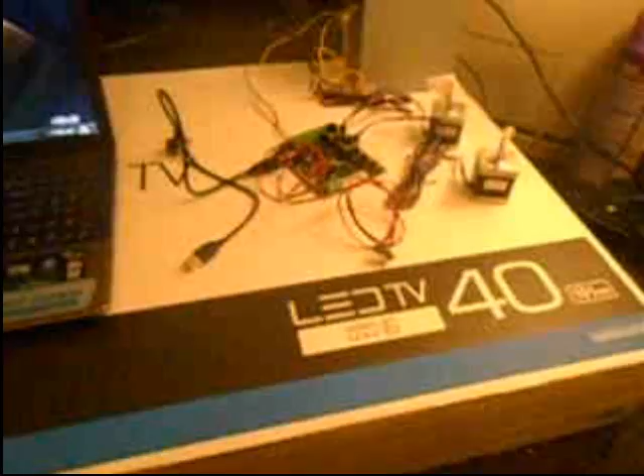Okay guys, this is the setup for my UV DLP printer, the electronics part at least. As you can see, I got a Megatronics version 3 from RepRap World and some stepper drivers.

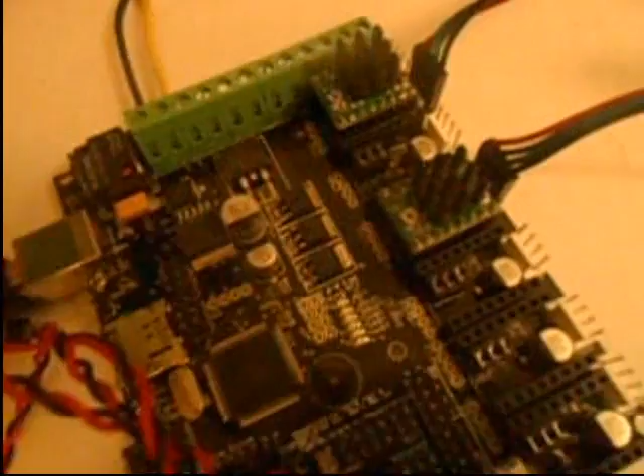We only need 2 for this setup and 2 stepper motors. These are some other stepper drivers, from Pololu. Now these particular ones won't work because they're old ones, but RepRapWorld.com assured me that all their stepper drivers work on this board, so you should have no problem. The only thing with these old drivers that do still work, that are on right now, is that they don't go on the same way.

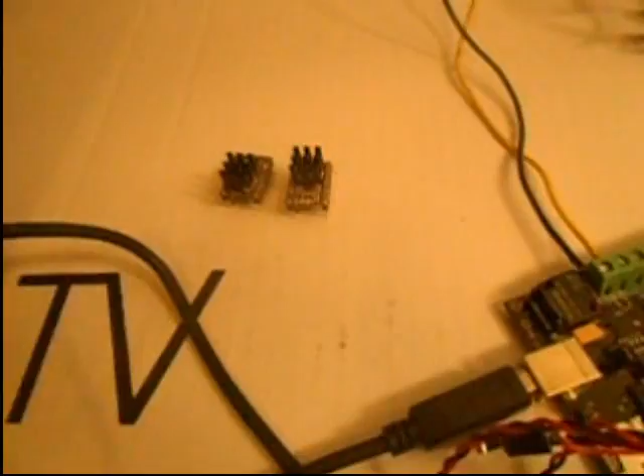So instead of that way, these go this way. Just be careful with that when you get these new stepper drivers. They are better, they can have more current go through them, and they don't get that hot either. So I'm waiting for some new ones from RepRap World. These came off my old ones, old printers I've laying around.

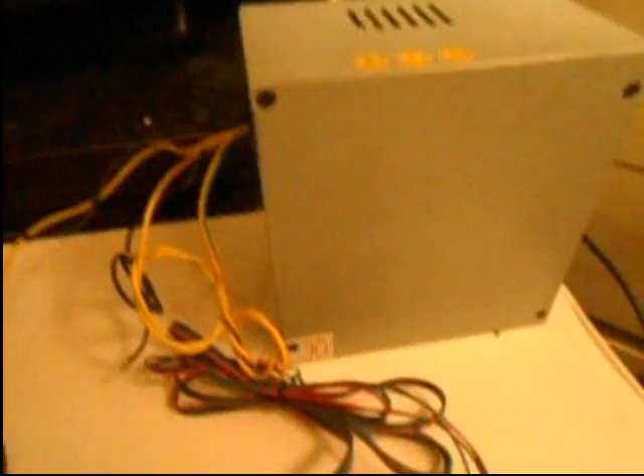So I'm showing you, this is my power supply. I tweaked the power supply so it stays on. You can YouTube that, how to do this. So I have my 12 volts going in there, and if I measure it when it's turned on, it says 12 volts on those 2 screws there. Then you know you have current going to it.

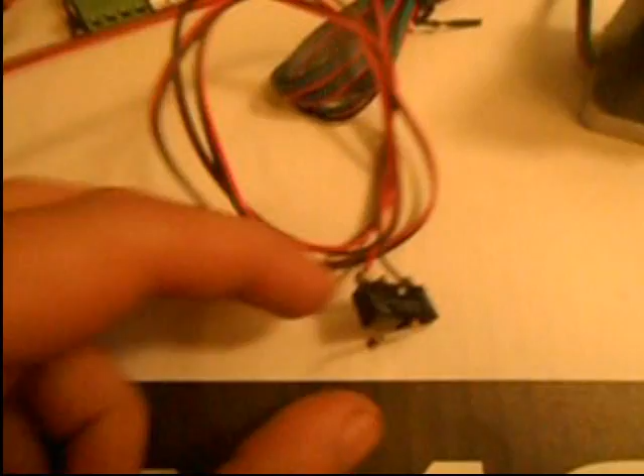So next we have a little USB cord. These are some end stops. There are 2 ways you can solder these, and I'll show you later. It doesn't matter how you solder it, because you can change it in the firmware. Right now I have it set up that I have to change it in the firmware, and I'll show you guys a little later on.

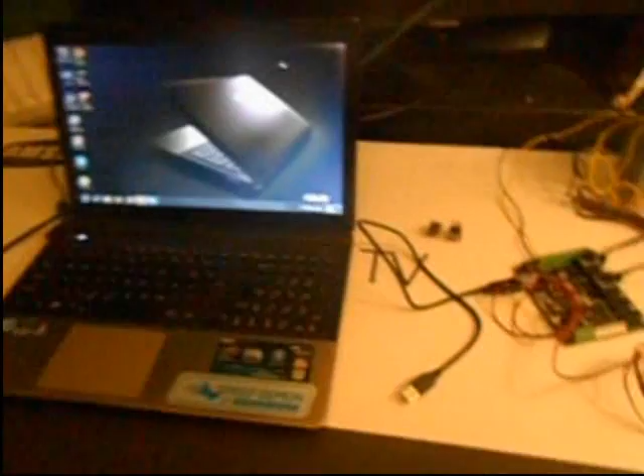We chose this board because who knows, later in the future we can add a monitor, like an LCD screen to this, and make it all standalone by itself. Right now we need the computer and we need a projector, but just for testing purposes I'm using my monitor. It's HDMI for better quality, just for testing purposes.

So here you go, this is the setup. All of this you can buy at reprapworld.com, very friendly people. And now I'm switching over to the computer. One more thing, let me just put a little close-up on the end stops.

What I have right now is the X minus. You can see it from here, the X minus and the Z minus. If you look on the side there, you'll see that there's a plus, a minus, and an S, and I'm using the S and the minus. Because if you have the plus and the minus, you short out the board. So just make sure you have that correctly, the S and the minus.

Okay, we're going to the computer now. Right now we're on the computer. I have a few things set up already, a few websites, and I'll explain a few things on the way, and in a few minutes you'll be up and running if you follow these steps correctly.

So I have some websites open: the RepRap World, the Arduino, and a website where we get a lot of information from, and you should check out this site because there's a lot of good stuff on it. But let's start with the Arduino board.

This Arduino board was a little bit easier to set up than the previous boards, because when I plug in my USB, Windows recognized it and installed the drivers automatically. Before that, we had to install the drivers manually, but now it's pretty easy.

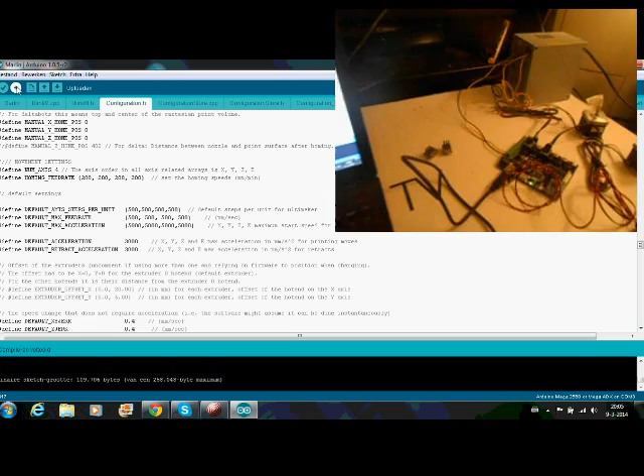So basically I'm gonna start uploading now. There we go, click. It's compiling again.

And then you'll basically see the upload on the board. Here we go. It's uploading. As you can see here, it's a pretty sizable firmware.

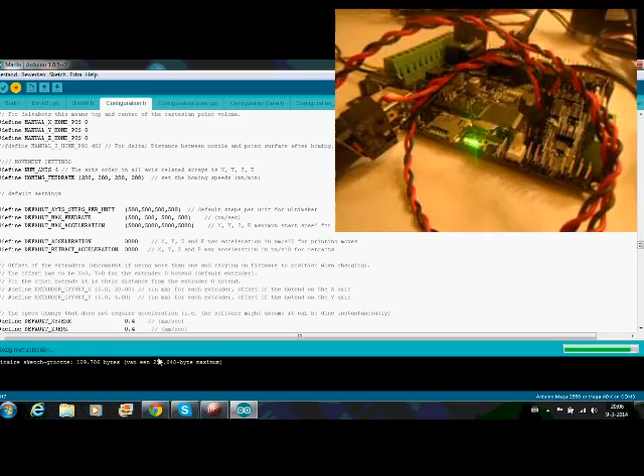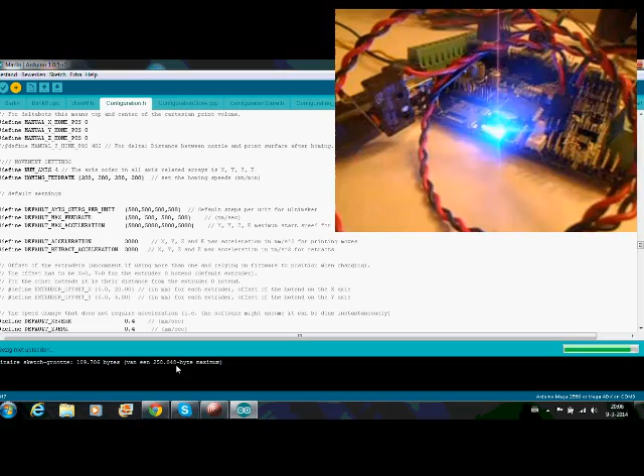But again, if we're gonna later on make LCDs and this and that, you'll need the space on the board. That's why I went for the Megatronics version 3. It's almost done. And boom, now you have your new firmware on your Megatronics version 3.

So what we do right now, we can minimize this because we're gonna later on work with this, but it's more for when you have the full printer in operation to go and tweak these things. So you can actually save it and close this. I'm gonna minimize it so I can change the settings later.

Basically I'm going to go now to this website here, build your own SLA, because I get the software that's gonna run this board from there. So I'm gonna open the software. Here we go, Creation Workshop, and this one. And we're going to download the Creation Workshop.

Goes pretty quickly, not a big program. There we go, we extract all the files on the desktop. Extract. Done already. I'm gonna minimize this again. And here we got our software. I'm gonna double click on it.

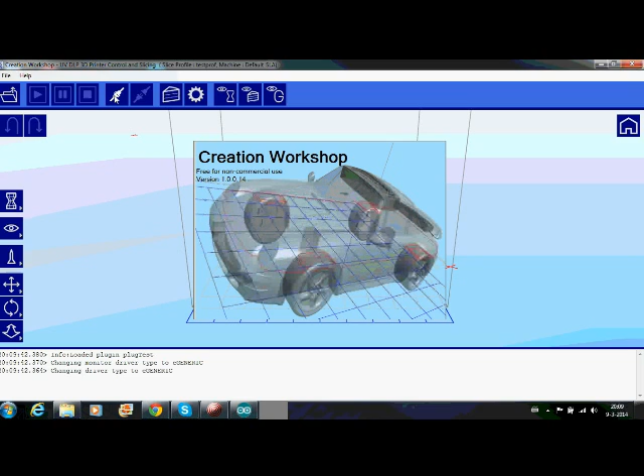Default as SLA, and then I'm gonna change this to my COM port, and my COM is 3, so that should all be good. Right now I'm gonna save this and close this. Right now if we go again here, we open this, and I connect.

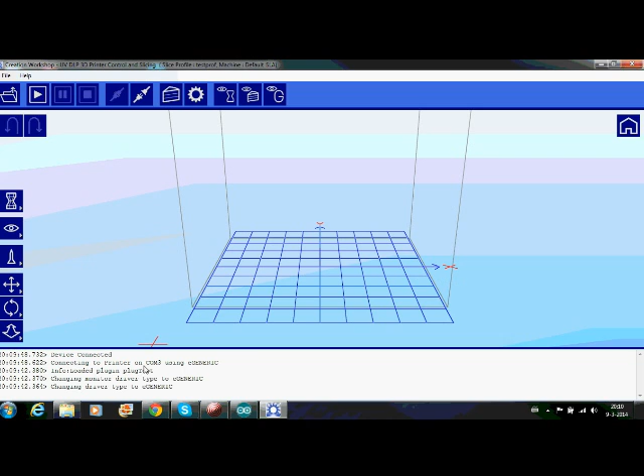Basically, there's a few other settings that I wanted to change. This is the settings button, basically configuration. Here I can see if my stepper drivers are working, but I first want to put which display I'm going to use for my display. And display 2 is my HDMI. I apply it.

Basically, if I connect again, my HDMI TV is now turned black instead of the window I have right now. Okay, so we are connected. This 3000 millimeters per minute is a bit too fast for me. I'm just going to change it to 100. And now I'm going to test the motors.

So I'm going to try to incorporate it with the video I'm making now. So I'm pressing the X 10 millimeters. It just needs to reset. There we go. Pressing the Z 10 millimeters up.

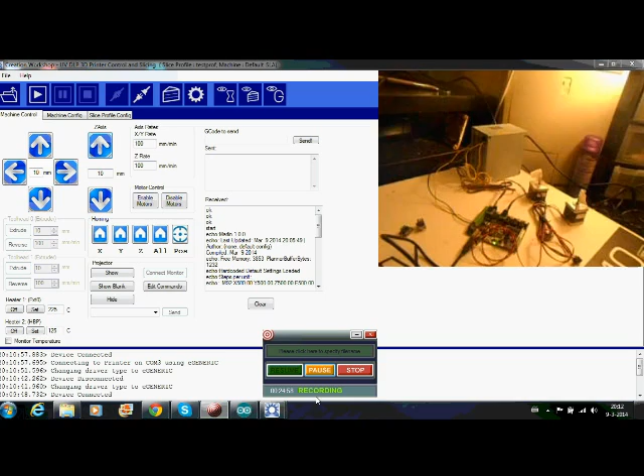Okay, I had a little issue, but I just forgot that I need to turn on my power supply. Whoop, I thought there was something wrong. Now the power supply is on. I'm gonna press that up again. Can you see?

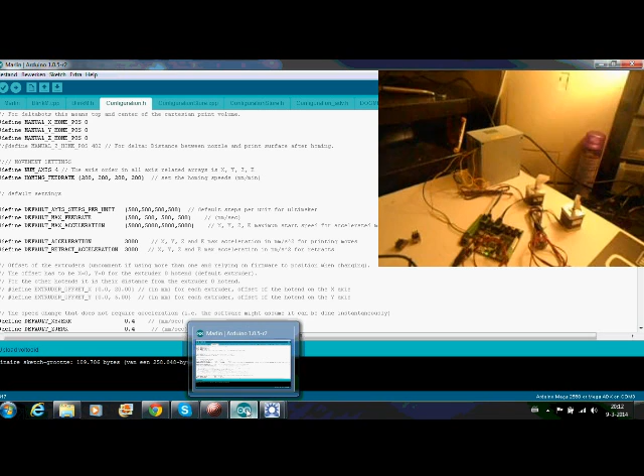It's moving. And that was basically 10 millimeters, set at 500 steps per unit. At 500 steps per unit, that's how much it moved. So if I change that to double, it will move twice as much, basically. So like that, you can tweak your motors, and I'll show you the X is moving the same speed.

If I turn this up to 400 millimeters per minute, you'll see... my battery is exhausted, but you'll see basically it goes 4 times as fast. Let me pause this and charge my battery.

While my battery is charging, I'm going to show you a few other settings. In the machine settings, you can see how big your print area is. We're going to try building one this size. If I hit apply, you see it automatically readjusts things. But if I go here, you can see it turned a lot bigger.

Now we're going to go further with the configuration, and here you can make your own profile. I'd suggest trying different things. I haven't built a UV DLP printer yet, but this is how we're going to test it.

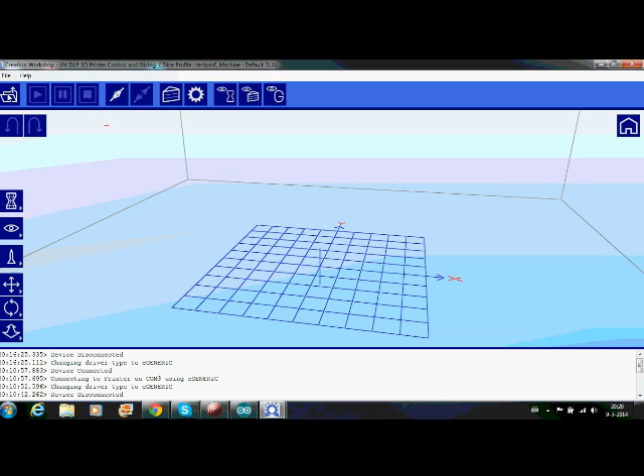I'm going to go back here in creation workshop and open up our STL file. Open - it's kind of big, and hopefully it'll fit. Seems like it's right out of bounds.

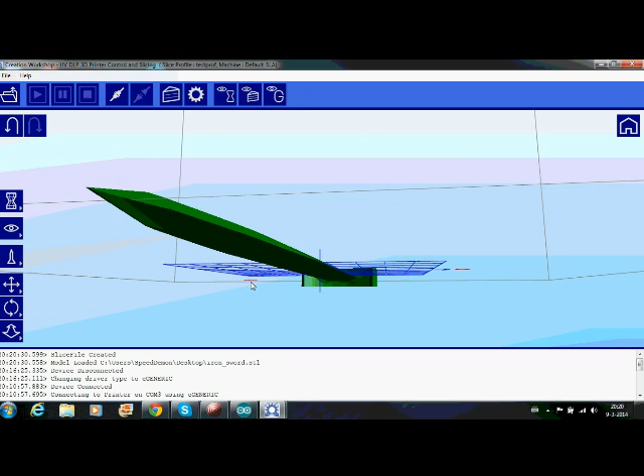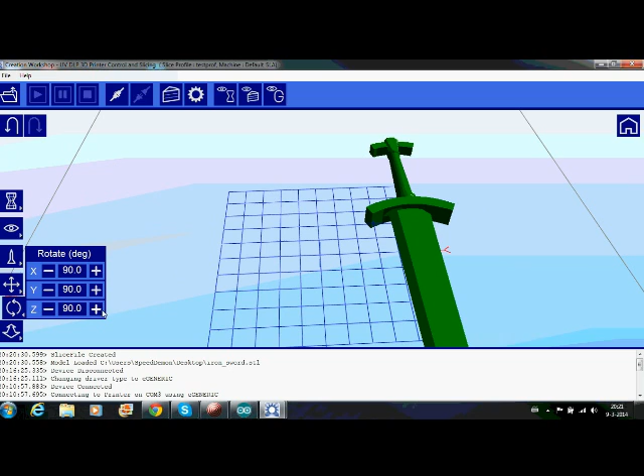So I have to minimize it or rotate it. I think I'll just rotate the object. The X - no, not the X. The Y - no, not the Y. The Z - and I want to rotate it 90 degrees. There we go.

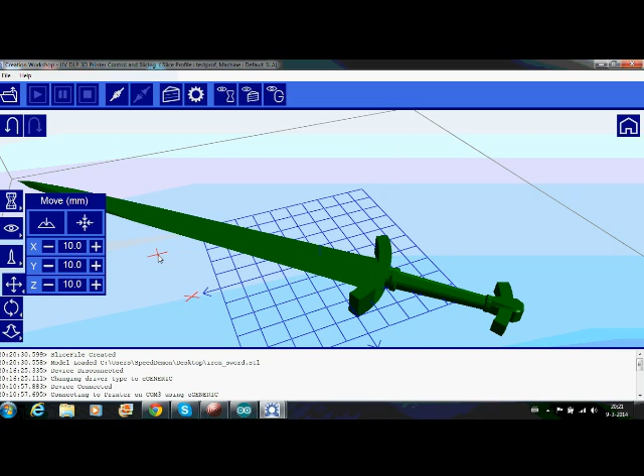Now place it in the middle. Seems about right. Maybe I can move it. Well, it's fitting - so here we go, put it there. It fits.

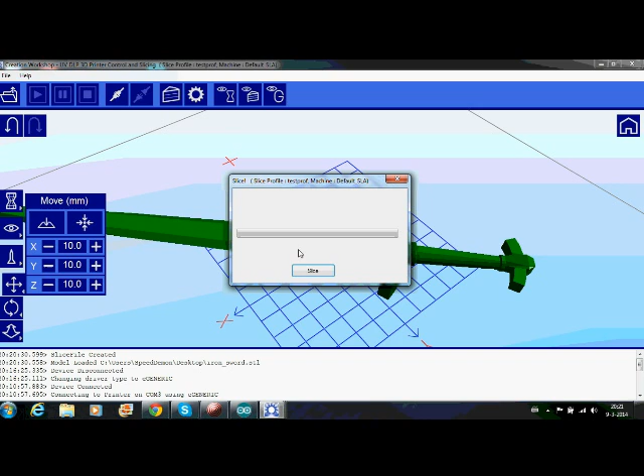Okay, so now we've got to slice it. Basically right here - let's slice, let's slice it. Here it tells you which configuration you're using in the setup bar, which is good - the one I'm choosing right now. And here we can see the slices - these are going to be the slices that it's doing.

Okay, right now I'm going to go back here. On my monitor it's showing me the images - basically those images. It's showing me on the monitor, which in the UV DLP printer is going to be the projected image. Okay, I'm going to pause this and get my camera out.

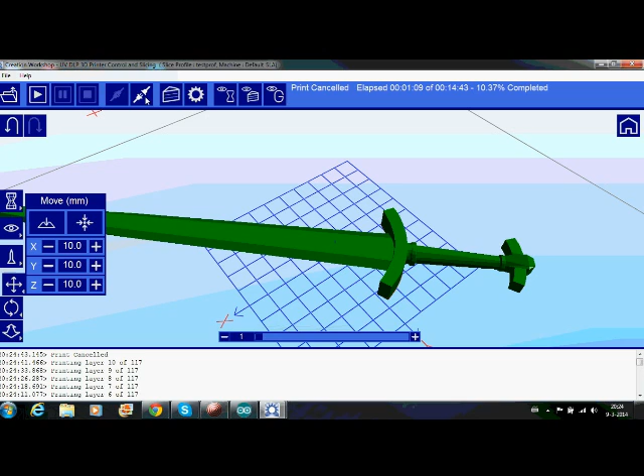So there's one more thing I wanted to show you. It's still printing the other thing - let me stop it. I'm going to disconnect the printer, and in settings you have these three tabs. In the slicing one, you also have a G code. In the G code, this is what happens in the beginning.

Now I wanted my motors to go until they hit the end stops, so right here I would put G28. And if you slice the whole project again, it would actually first try to hit the end stops, and then it will continue with the print. So good luck with your project, and that's that.

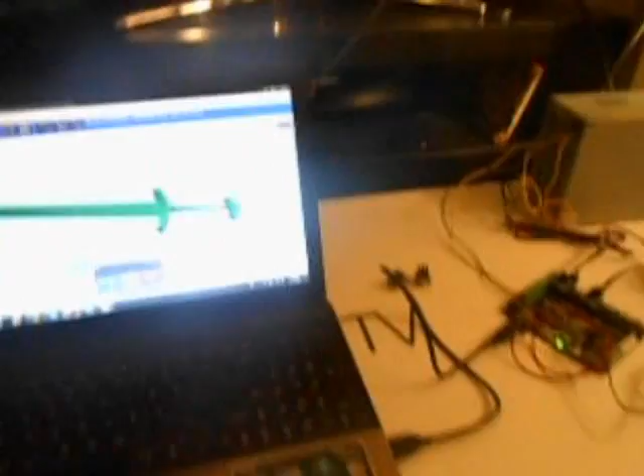Okay, here we have our setup. No need to continue there, but we're going to continue here. Right now I'm just going to press the connect button. It'll connect everything - my monitor is showing black - and I'm going to press the play button. Go.

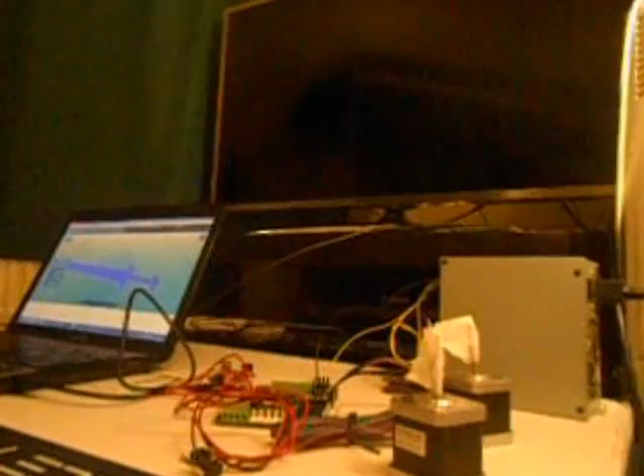So now it's playing and also showing me different images, and that'll continue until the print is finished. Okay, I wish you good luck.